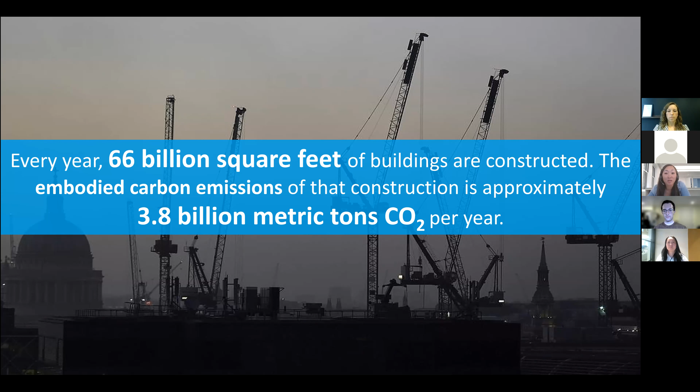In fact, we're building so much that we're actually building a new New York City every month for the next 30 years. And it's estimated that between now and 2050, we're going to be adding 2 billion people to the planet and close to doubling the square footage of the built environment.

So that was a very brief overview, but we know that embodied carbon is a big portion of a building's overall impact. You might be wondering, how much embodied carbon does the structure alone account for?

This was a study done by Arup, and these donut charts are essentially illustrating the embodied impacts from various building types. What you can see from each of them is that the structure—both the superstructure and the substructure, shown in green and red—accounts for over 50% of a building's embodied carbon.

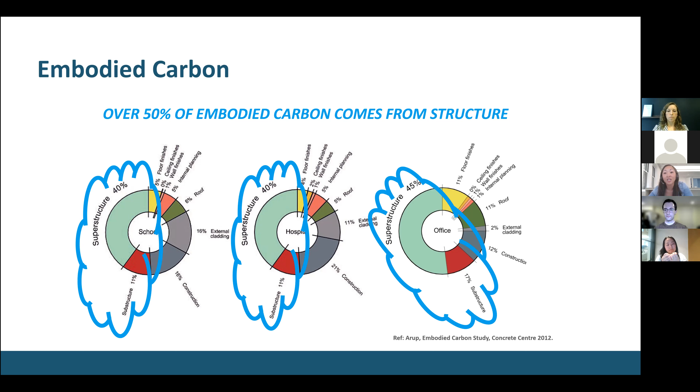So as structural engineers, we have direct influence over what materials are used and in what quantity, and therefore we can really greatly impact the sustainability of our structures.

And so the structural engineering community has been wanting to do something about embodied carbon, and that has been occurring with an effort called SE2050. This is the first and only national program dedicated to the structural engineering profession, whose sole purpose is to achieve net zero embodied carbon structures by 2050.

A little history on this effort: with embodied carbon becoming increasingly on the design community's mind, it was really within the Carbon Leadership Forum, the group out of the University of Washington, that wanted to really do something about this. They incubated this idea of getting to net zero embodied carbon by 2050, and what came out of that was them issuing a challenge to the structural engineering profession back in 2019—that all structural engineers shall understand, reduce, and ultimately eliminate embodied carbon in their projects by 2050.

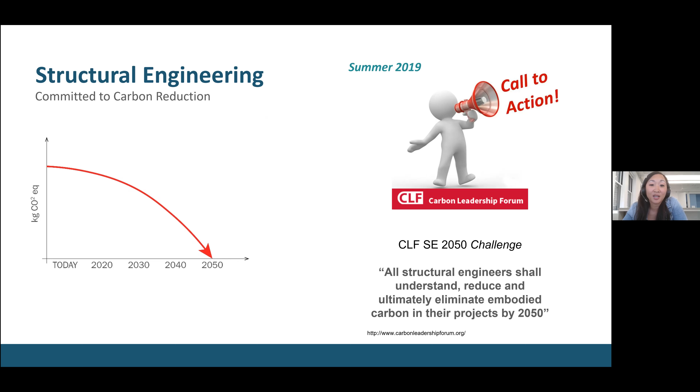Around that same time they were developing the idea of the challenge, they approached the Structural Engineering Institute, SEI's Sustainability Committee, with the idea of developing the US program for structural engineers. It was back in December of 2019 that the Board of Governors for the SEI voted their unanimous support for the challenge. It's been within that SEI Sustainability Committee that we've been developing the SE2050 commitment, and our program officially launched at Greenbuild back in 2020.

To date, we currently have 82 firms committed to the program, and this is growing, which is super exciting. We've had over 52 firms submit their embodied carbon action plans, and over 100 projects' embodied carbon data have been submitted to our database.

This database will be used to set real benchmarks for projects, so the industry will now finally, or hopefully soon, all have accurate benchmarks to use as an industry. And then eventually that data will be used to start to set embodied carbon limits for projects.

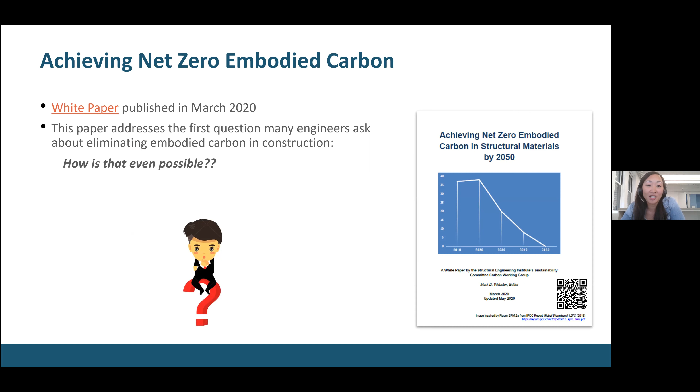So you may be wondering, how can you actually get to net zero? This was something the Sustainability Committee looked at and developed this white paper that really explored that exact question, and how is that even possible?

The paper outlines a couple different scenarios of how we can get there through a combination of design improvements, greening of the electrical grid, material production improvements, and carbon offsets. These tracks could combine in many different ways to get us to net zero.

This chart is showing a few of them, and there's really no clear path, or no one path I should say. But what is clear is that it will take more than design improvements alone to get us there.

Looking at these possible scenarios that the paper explores in more depth, I think the fourth bar is really what we're hoping for. We're hoping to see really big improvements in design, the grid, and the production of materials, combined with carbon sequestration of materials, so really no offsets essentially.

That fifth bar, with the bulk of the yellow, is really the least desirable, where we're not doing much to change the status quo and really relying on that offset category. Anyway, take a look at that paper, it's a really interesting read in your free time.

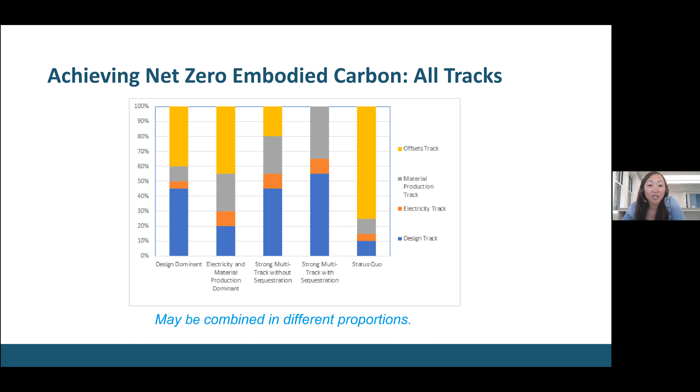The vision of SE 2050, we really see this commitment program consisting of three main parts: plan, implement, and share. By plan, the structural engineering firms commit to establishing an embodied carbon action plan, where they indicate how they'll educate their firms about embodied carbon, how they'll report embodied carbon on their projects, how they'll document their embodied carbon reduction strategies, and how they'll advocate within the industry.

By implement, we'll have the structural engineering firms engage in sustainable goals on projects, specifying low carbon impact materials, and assess and understand the embodied carbon impact of their projects' design decisions using LCA methodology. And then finally share, that's where firms share embodied carbon data of their projects to a central database for understanding and developing national trends and appropriate reduction targets.

So how does it all work? There's really only three parts of joining SE 2050. First, we ask that you complete a signed letter by your firm leadership saying that you're committing to the program and going to meet the requirements. Then within 6 months of submitting that letter, you need to develop your firm's embodied carbon action plan.

And then lastly, you'll need to submit embodied carbon data from 2 to 5 projects per year, depending on the number or size of your firm. Now obviously those are just minimums—we would love to have more project data submitted to the database, and that is what we've been seeing with that over 120 project data that's already been submitted.

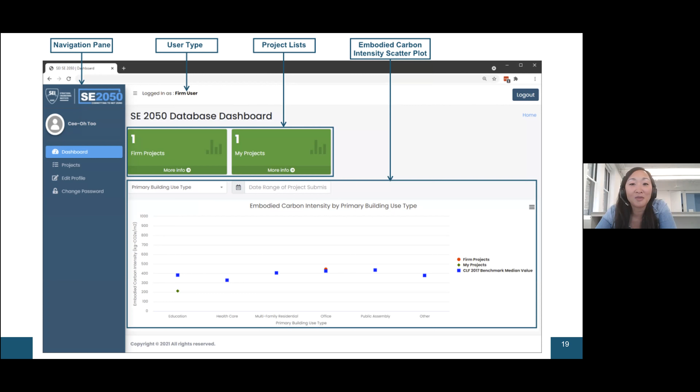A quick snapshot of what that database looks like: as a signatory firm, you'll get a login and be able to look at the database. In here, you'll see all of your project data that you've entered. Right now we're using one of the CLF benchmarking studies to have some plots based on different building types. We're really excited about this, it just launched less than a year ago, so more to come on that.

So, are you ready to join that movement? Let me leave you with a few resources and next steps, and I'd be happy to share these slides with you so you don't have to write all this down.

And really just highlighting some of the resources we've been developing at SE2050. A couple things have come out recently - if you haven't checked the website, we have a really great guide that outlines all of the embodied carbon credits for the North American green rating systems. I think we've captured most of them, we're trying to add a couple more, and we're working on a European guide as well.

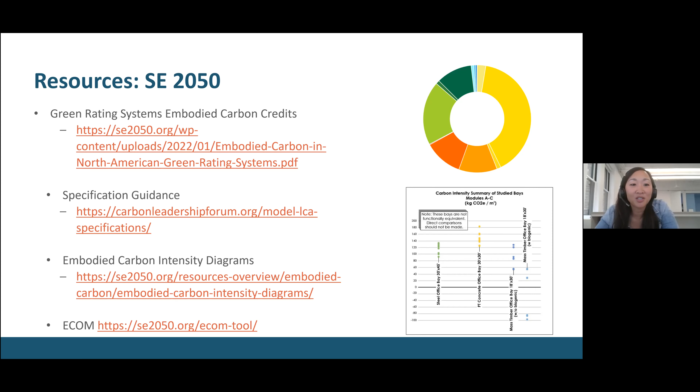And then the last two - I think we have a few minutes, so let me dive into the embodied carbon intensity diagrams first. These were an interesting project undertaken to really increase the profession's embodied carbon literacy. Similar to how in schematic design you can rattle off different tonnage of steel for certain framing, for example, and material quantities for concrete and whatnot.

We wanted to do the same thing for embodied carbon metrics. So what we've been doing is studying different typical bays of framing. We've had at least 3 different engineers design the framing with some basic criteria, and then we've run those material quantities that we developed from those 3 designs into different LCA softwares.

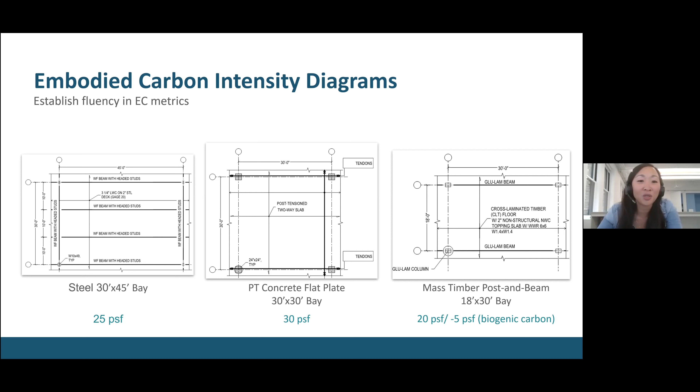From all that, you're getting an equivalent pounds per square foot of embodied carbon in these different floor systems. Check out the website, there's a bit more nuance to this, but essentially that steel 30 by 45 bay has around 25 PSF of embodied carbon versus the concrete flat plate at 30 PSF. The mass timber, or timber in general, we've reported both numbers, whether you include the biogenic carbon or not, just given that there's not a lot of consensus in our industry on what to do with that. So that's why you see those 2 numbers reported.

There are 4 more bays that are pretty much finished and hopefully getting up on the website very soon. Hoping that these are useful to you all and you can start to use them to increase your literacy in embodied carbon.

There is some work underway potentially to look at different lateral systems and how that impacts embodied carbon as well, but that's still kind of in the works.

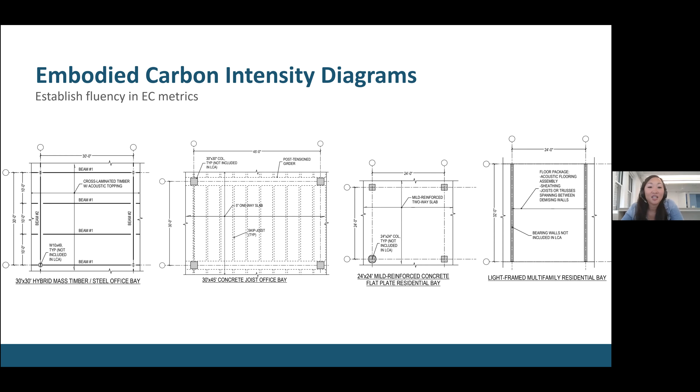So you're totally acceptable right now to submit this embodied carbon data into the database for your SE2050 commitment. This information is just based on industry average EPDs right now.

I do think ecom is great for these kind of simple studies, but as your firm gets more involved in the LCA space, you'll start utilizing a tool that can do the full life cycle phases, look at all the different LCA impact categories, et cetera. But for now, it's a great way to get yourself started if you're new in this space.

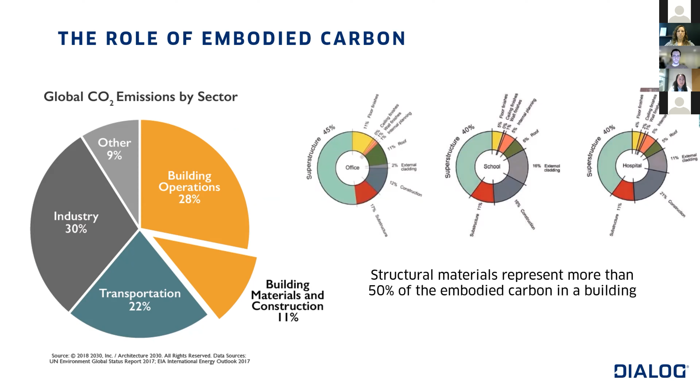So in August 2021, DIALOG signed on to the SE2050. In January of this year, we published our Embodied Carbon Action Plan, which is now live on the SE2050 website. This document is very much our roadmap and outlines the why, the how, and the who. As a fully integrated design practice, DIALOG has the unique opportunity to address and reduce both the operational and embodied greenhouse gas emissions of our built environment.

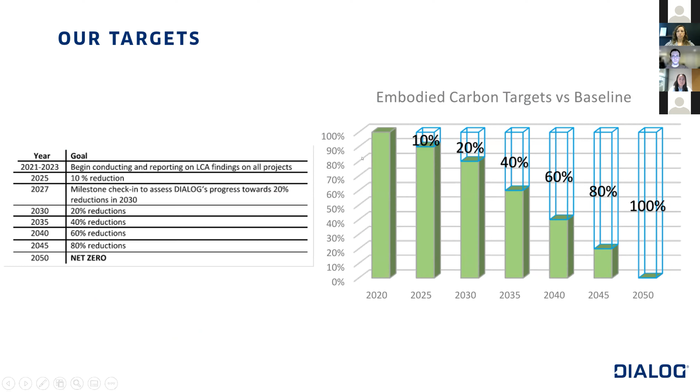Now, the question of the day, or rather for the next 20 some years, is how are we going to get to net zero? Well, we have to start early. The start of the project is where we can make the biggest impact. We plan to educate our design teams to follow the hierarchy of carbon reduction potential as outlined in the Institution of Structural Engineers Design for Zero document.

This hierarchy begins with, firstly, build nothing, meaning can we use the existing building completely? Build less. Can we minimize new construction and use the existing structure wherever possible? Build clever. Can the new structure use the minimum design loads and serviceability requirements? Can we optimize our structural arrangements? And lastly, build efficiently. Can construction waste and emissions be reduced?

Guided by this hierarchy, we will start conducting LCAs on all our projects, first at the 90% schematic design phase, then once again at the 100% CD phase, so for construction documents.

Each of our 5 studios has identified a representative to champion this practice-wide effort. Their role will include answering questions related to embodied carbon or conducting LCAs, to developing and presenting education sessions at DIALOG. In addition, they will advocate for studio needs and maintain awareness of global trends and relationships with industry leaders.

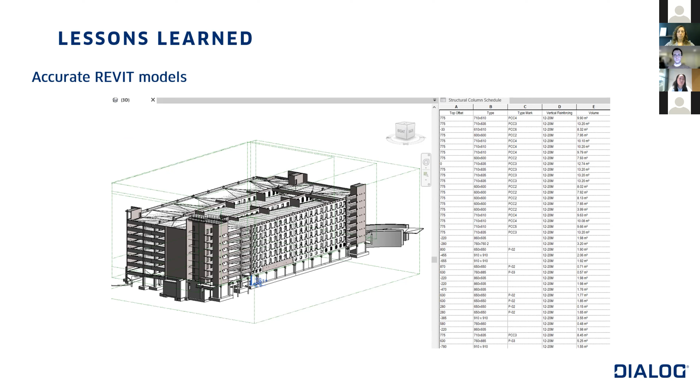This also highlighted the importance of having a complete and accurate Revit model. If this means we need to spend a bit more time modeling in order to assign the proper element and family to each member, then this is what we have to do. We have a great tool at our disposal and we need to find the best way to leverage it. This also reminded us that we need to involve the technologists and communicate what kind of information we require so they can best help us.

Another lesson learned was that it is beneficial for the same engineer to do the LCA. Again, this supports the idea that one single person shouldn't be responsible for the entire team or company's LCA. As much as we want to automate the process of just exporting the quantity takeoff from Revit, we also shouldn't blindly plug and chug numbers either. An engineer who has worked on the project will have a much better understanding of the project and be quicker in every aspect because it's not their first time looking at the model and sorting through the structure. Also, they may be able to sense that something is off quicker.

We have to remember that the idea is not to do more LCAs. Our goal is to change the industry and get to net zero. How we do that is going to depend on building up our knowledge with structural systems and the role that embodied carbon plays in them. This cannot be done by a select few. We need everyone on board.

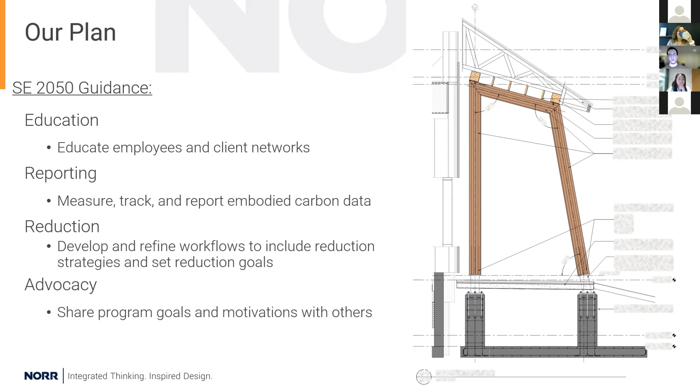Finally, advocacy is the last pillar. Similar to education, we make efforts to outreach to clients, other structural engineers we know who haven't joined this commitment yet. We like to take the time to reach out, share what the program is about, why it's important. It is an important step. If we can get everyone on board, obviously the challenge becomes a lot easier to tackle.

So just some successes, I'll try and wrap this up quickly. The first success is more of a shift in the design mindset. Great architecture and engineering should be carbon responsible, and we see that change happening in discussions between our engineering and architectural teams. People are generally open to discussing the effects of carbon and how we can reduce it. Everyone acknowledges it as an important step in the design process, which is a good success.

The second point is that engineering input is critical in the early stages. Again, we're trying to keep the mindset that this is a step in the design process. This isn't necessarily a number you crunch at the end of a design. You really need to be aware of this throughout the entire design process. So that's something we've been successful in doing.

Another mindset I like to personally keep in mind is, if you hold carbon considerations in the same level as you would safety considerations in a design, it really helps remind you that we need immediate action. And if you hold the two in the same light, it really motivates you to optimize for carbon as you would optimize for safety.

Some other successes, as I mentioned, we have a collaborative engineering and architectural practice. We've had a lot of success in setting up interdisciplinary teams to really communicate back and forth on how we could reduce carbon while still meeting client requirements or project requirements.

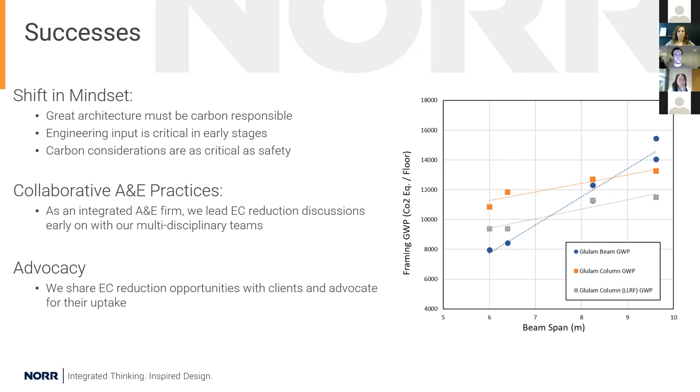And finally, advocacy. Every education opportunity we can, we send it to our network, our clients, co-workers, or colleagues at other firms. We generally try to share as much information as possible in the name of advocacy. So we joined SE2050 almost exactly a year ago.

Just 5 takeaways to wrap this up. Number one, this might come off as a buzzword, but it is really important: adaptive reuse must be the first consideration whenever applicable. The least carbon intensive building is the one that's already built. So if we can make use of what we have, that's always the best option.

Two, carbon calculations are a critical part of the design process. If I could tell you anything, it's to treat it as if you are designing for low carbon -- again, not just a number you're crunching at the end of a project.

Three, challenging design parameters is an effective way of reducing carbon. A lot of clients will have preferred live loading values, for example, which are conservative and may have their own use. But if you really start to scrutinize these set design parameters, it's an effective way to ultimately reduce loads on a structure, or change what the structural performance is intended to be, to a more reasonable and carbon-friendly level.

Four, tracking embodied carbon is as important as specifying reduction strategies. Like I said earlier, it is important to know where we're going in terms of our ability to reduce carbon. And it's also important to share that with the broader community to really make sure we're on track, and see what works and what doesn't.

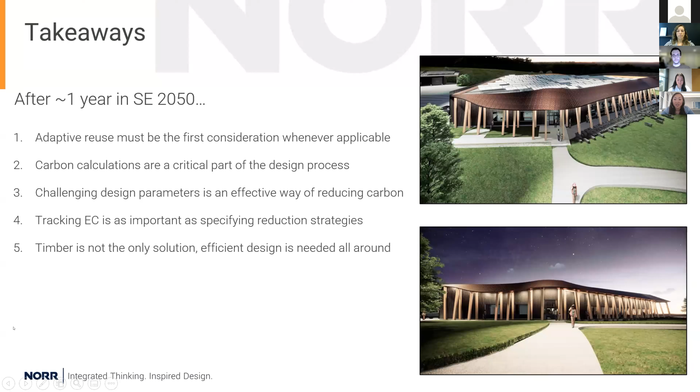With all the different LCA tools, references, and data out there, how do you decide on a consistent methodology for calculating embodied carbon in your projects? What's missing for this to be done consistently across the sector?

What I will say is, if you can be consistent within your own firm and your projects, that goes a long way, so you'll know from your data how well you're tracking project to project. That's key at first—making sure that if you have multiple modelers, they're all modeling things the same way, so you know what's included or not when pulling material quantities from your Revit model. Look out for some references and resources coming that should help standardize things across the profession. But I don't know, Elaine, Emily, Benjamin, any further comments?